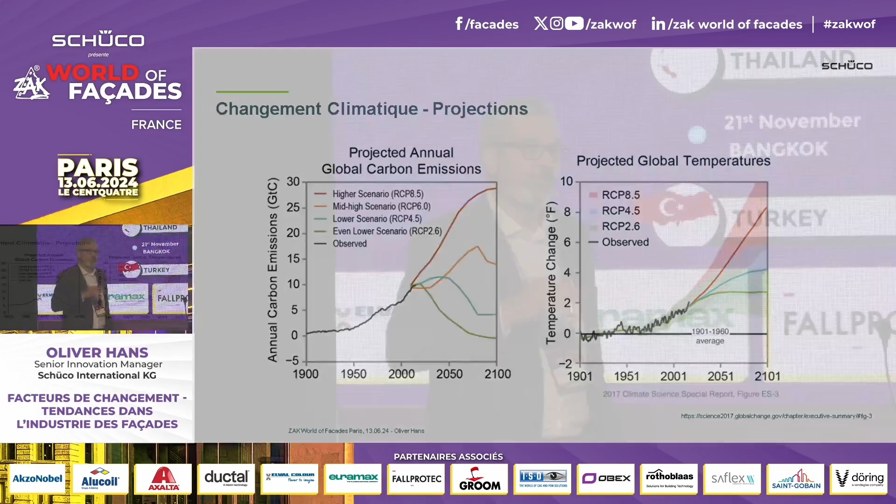And the average global rise of temperature last year was 1.3 degrees. But that is sea and land. If you take out sea, it's 1.8 on land. And Europe is one of the fastest heating continents. And this leads to a lot of countries developing risk maps. They're assessing the potential risk and how resilient the country is and certain regions are.

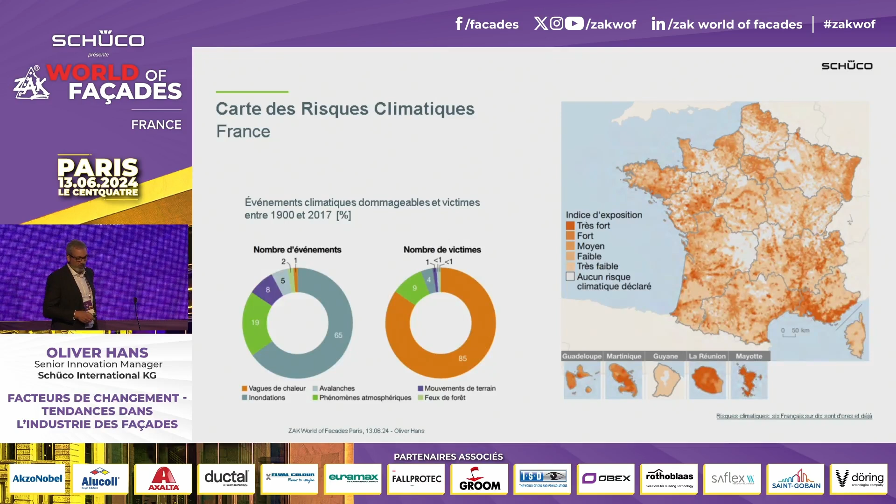And we can see that over the past 117 years, the amount of events, or the percentage of events, the highest being flooding, and at the same time, on the right side, you can see the impact it has on humans. And human death is connected to heat, not so much to the water problem we're getting. And this is costing huge sums of money, and this is costing a huge sum of lives worldwide. And this is growing, and this is why everybody has to act.

And as we saw, the curve is exponential. It's not a slow linear growth. The pressure is going to increase. It's going to have to increase because it's economically sensible, and it's also protecting people's lives. And more discussion is on this subject, and we can see that The Economist in April had a title story on it, making it clear to people that this is a huge shift in economical logic.

And we can see that there's startups going into this area, making it viable to assess the quality of a property before I buy it. And insurance companies are reacting to these risks. Huge costs. The whole risk management is changing. And there's areas in the world where you can't even get an insurance for these risks, which means the properties are basically not of any value, and at least in the next couple of years, the value will degrade, and that is exactly what The Economist was looking into.

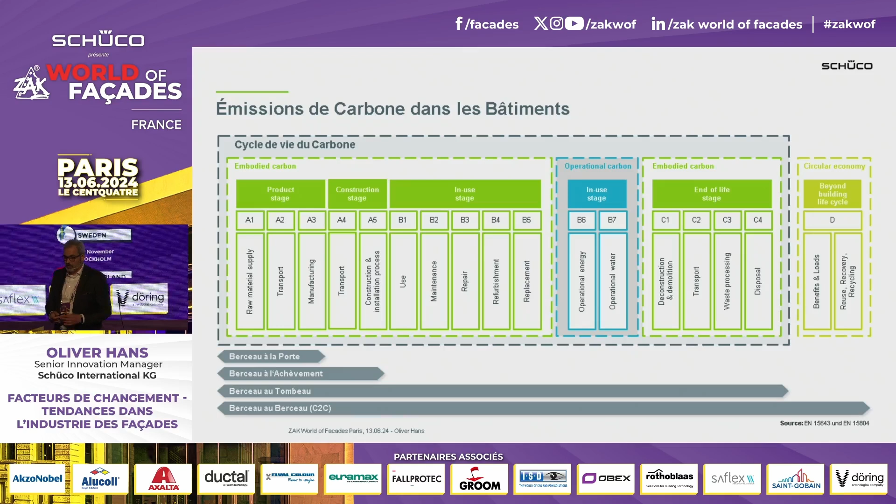And there's been a lot of addressing of this topic in regulation, and one of the EU norms has looked into the whole life cycle, the carbon emissions in the whole life cycle of product. And it's changed a lot. We used to focus very much on the operational carbon side. How much energy are we using in the use of this building? But it's shifted to a more global perspective. So we look at how much CO2 is emitted during the transportation of getting material to the factory to produce the product that is then installed in the building, and so on, and how much CO2 is in the maintenance of this product when it's installed in the building.

So we've shifted from basically producing something, watching what is happening in use, and then thinking maybe about the recycling part, to assessing the whole life cycle. And this includes water by now, and this also includes biodiversity, which is a huge issue, which we underestimate, I think, as humans, because we can't see it as much. We don't really react to things we can't see. That's why the oceans are not of a big issue to us at the moment.

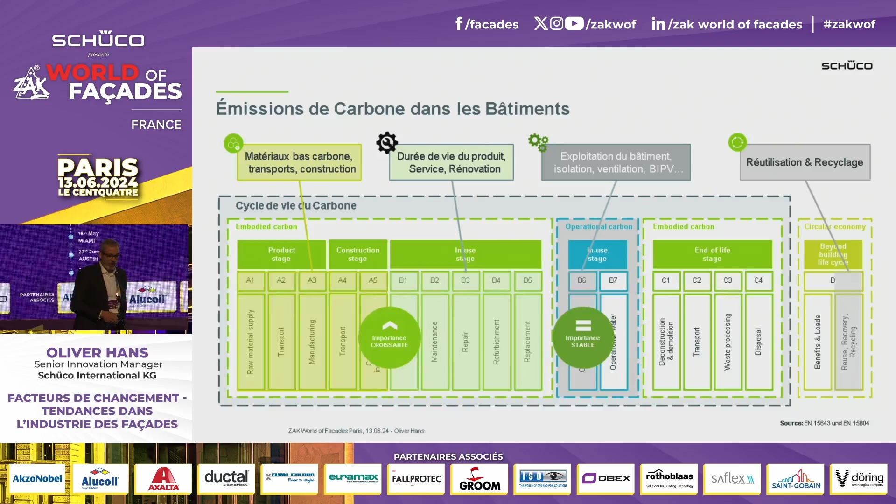But this whole operational use of carbon, or the production of carbon in the operation of buildings, will remain, but all these other topics will shift in the way we look at buildings, and there's a sort of carbon economy underlying this change. And all that said, it has led to a project we launched over a year ago, which we call Carbon Control, which sort of aggregates the services, the product logic, the things we can combine in one large toolbox to address the carbon emission issues that we have in our product, in our industry.

So what is Carbon Control? Well, Carbon Control is basically a logic. It dissects the life cycle, as we saw in that regulation chart. It dissects the life cycle of product, adds service, and puts it together into a package where we look into the planning of buildings and facades, the construction, the operation, and the deconstruction. So we have, on the top left, design to decarb, we have build to decarb, we have operate to decarb, and we have recycle to decarb. And these areas all look at facades in a bit of a different way and offer a different service logic for the respective quadrant.

So in the design to decarb, we have different services and different approaches that we use inside the company. So for instance, we assist in designing the right covering of the building, understanding the amount of aluminium that is needed in this design, trying to reduce the aluminium. If there's a bespoke solution, of course, it's the economic viability of a project. If we can reduce the cost, reducing aluminium usually reduces the cost.

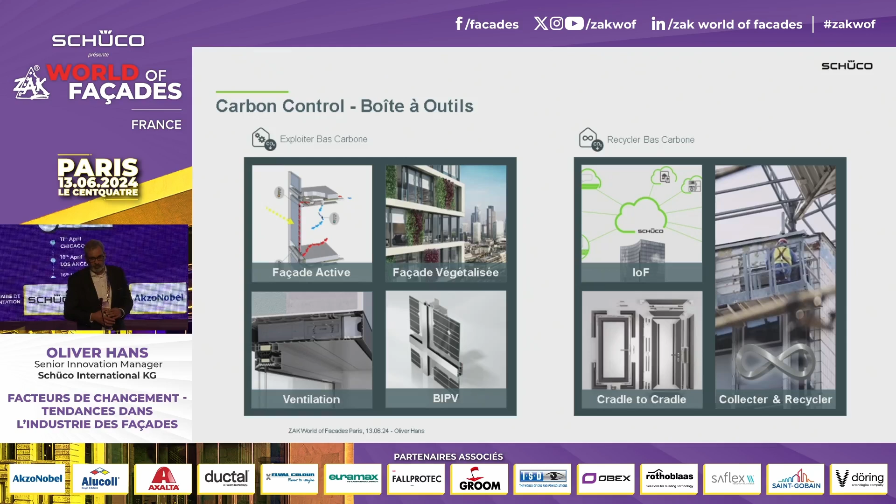And I say that because the automotive industry needs aluminium very much at the moment. Electric vehicles consume a lot of aluminium, and at the moment we have a situation where there's very little aluminium coming out of the building construction market, and we have to keep that in the construction market because aluminium is a super recyclable product.

So let's go into renovation. If we want to use less, we have to renovate. We have to use the structures we have and use them for as long as possible. We just saw that in the Bollinger-Grohmann presentation. Super interesting project, and that's exactly the way we have to go, especially the last project in Düsseldorf, which of course I know.

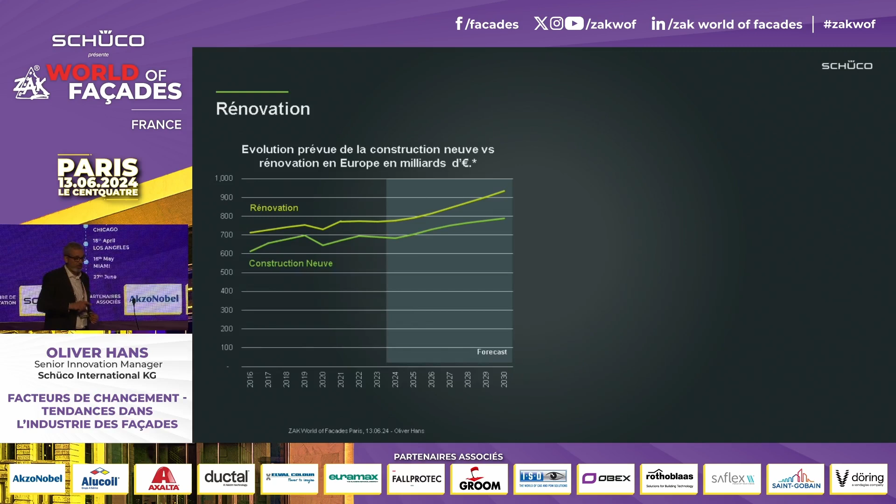So renovation has always been a large segment of the market, and it will be a growing segment. We all know there's a renovation wave in Europe, and there's going to be pressure, there's going to be money put into it, and it will also be because of the climate change that people will be driving it even more. I said it's an exponential curve. We'll be feeling it harder, and we'll be reacting harder.

And in France, the figures are not so different to Germany. We heard already in the first presentation, and Jacques Lador also said it, we have very hard carbon goals, and this means that we have to work on our buildings, our building stock, because the building stock is the largest part of our built surroundings.

And in Germany, the figures are the same. If we want to achieve the targets, we'd have to be renovating approximately 3 to 3.6% of these buildings. De facto, in Germany, we're renovating about 0.6. So the speed has to increase massively, and it will. There will be force.

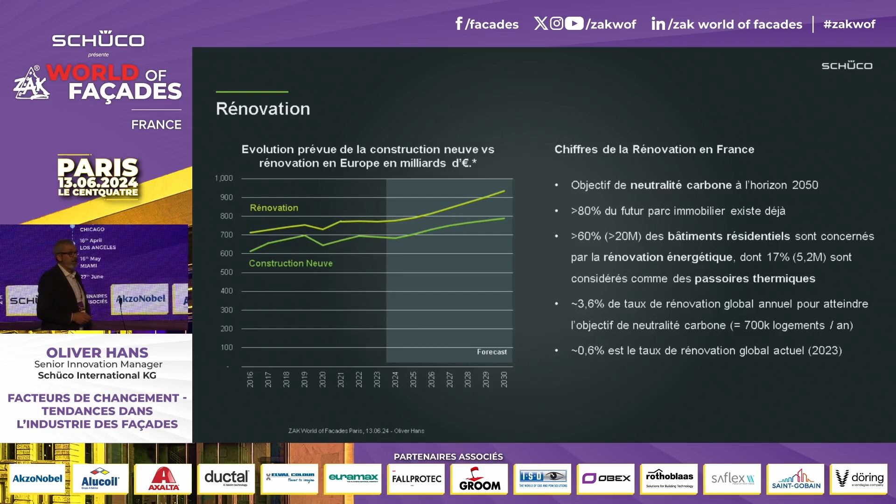So what types of renovation do we have, or what do we see as potential renovation at Schüco? Well, try not to renovate. Try to keep something functioning as long as possible. So maintenance is the first thing. We have our own service team at Schüco that services products. In the Netherlands, we have a service team that services competitor products because we believe we have to keep these things functioning as long as possible. And it is a business.

If things break, repair them. Build them so that they can be repaired, which we do. We have a systems tradition, so we can take new fixings, for instance, and introduce them into old systems. We can repair old systems. Not all of them, but quite a few.

Sorry, one back. We can upgrade systems. So we can add new gaskets, for instance, and make it airtighter than it was, even when it was introduced. We can refurbish. I'll be showing an example where we put in new vents in an old frame, and in that way we can decrease the U value, airtightness, etc. It's not trivial, but it can be done because we have a system logic.

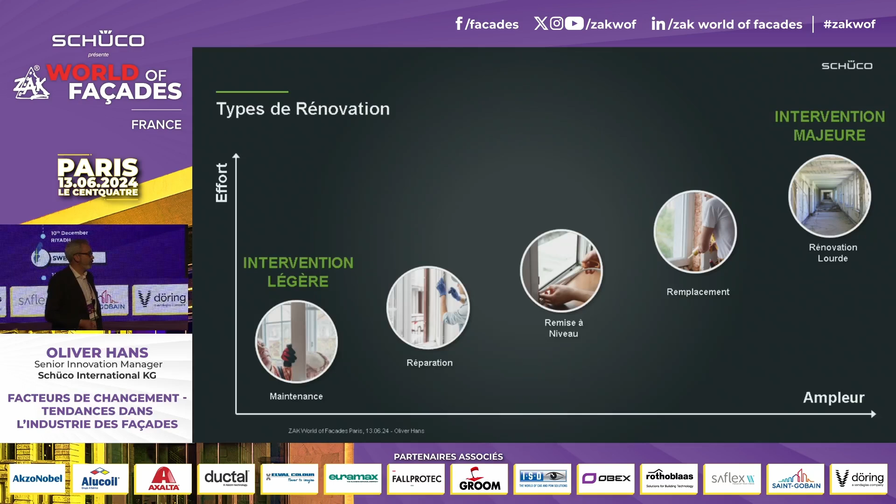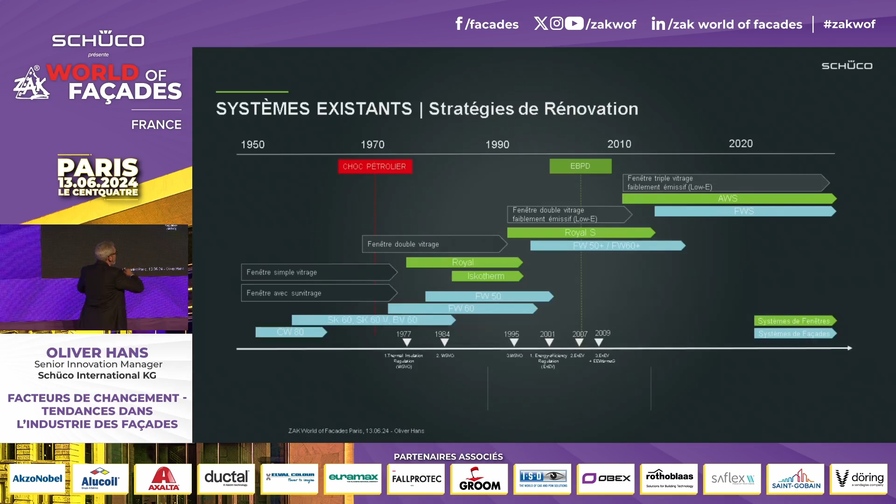And in the worst case, renovate, extract, and put in new. That's the easiest, and that is the most common in large-scale projects. So if we look at our system legacy, these are the non-insulated systems. Then came the energy crisis. We introduced the first insulated systems, and the insulation values have grown over time. The systems have become tighter.

They've taken first double glazing, then double glazing with coating, and the change of filling gases, and then later triple glazing. And we've even had projects with quadruple glazing. But some of these systems can be adapted. They can remain in the building.

The really old systems that are non-insulated will commonly have to be changed, although we're working on improving non-insulated systems and lifting their U value. We'll be showing that in the near future because there are ways of doing that. And I'm working on a project in the Netherlands where we're doing that at the moment.

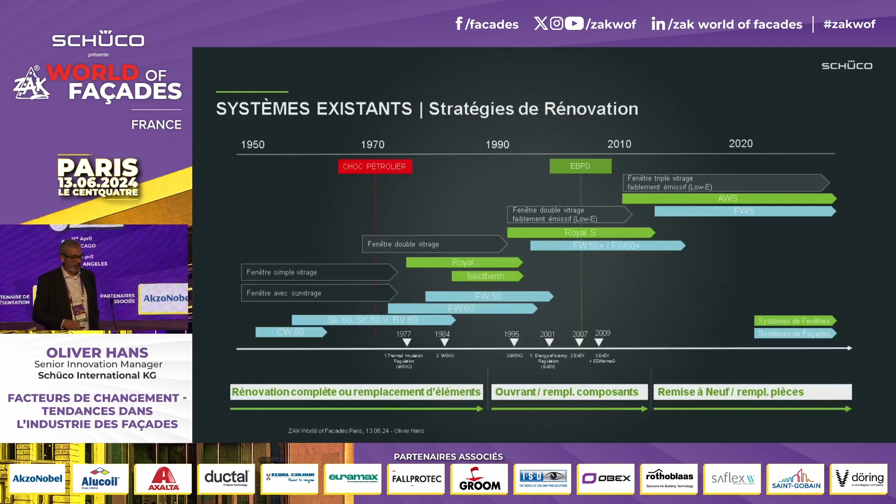Or we can change components, we can upgrade them, change the vent, for instance, which I'll show in a second, or just change gaskets, add foam sometimes, and that can be enough to lengthen the lifespan of this product in situ. So I was saying we can take out old vents and put in new vents with new fixings, etc.

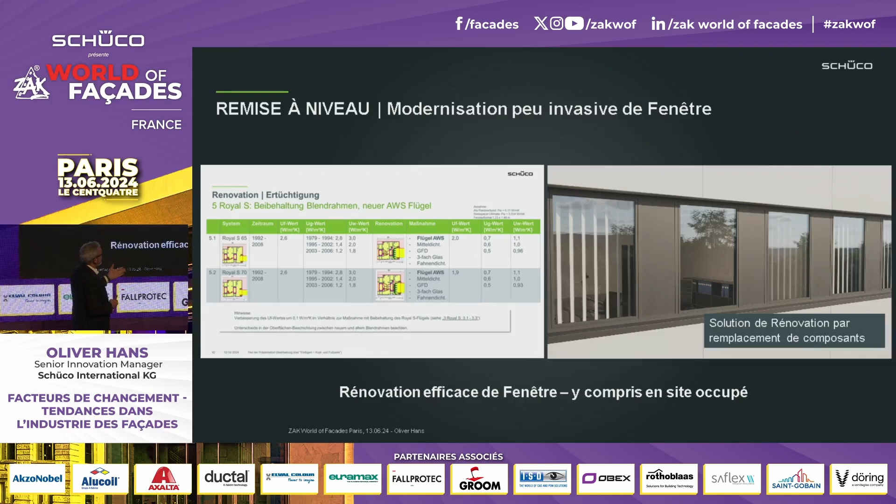We've looked at it in different compositions, and you can see here there's a UW value of 3, which by changing the vent with added foam, changed gaskets, we can change to 1.1 in situ.

And this is not something we can do in every project. We have to look at it very intricately because there's building physics. We don't want mold in the building. We have to look at everything in the situation in the building. But we have looked into it, and it is possible, and it's possible because we have a long-term system logic.

Other variations are taking the old frame and putting on a renovation frame, inserting a whole new window in the same place. Again, we have to look at the specific building. It's a project solution, but it can be done, and we have been doing it in different projects for quite a while now.

Other minimally invasive tech is adding layers to an old system in facades, for instance. So similar to what we saw in the windows, we can do something like that in stick constructions. It's actually not as complicated as you could see in the video. And if structurally capable, we can even upgrade the quality of the glass in that area.

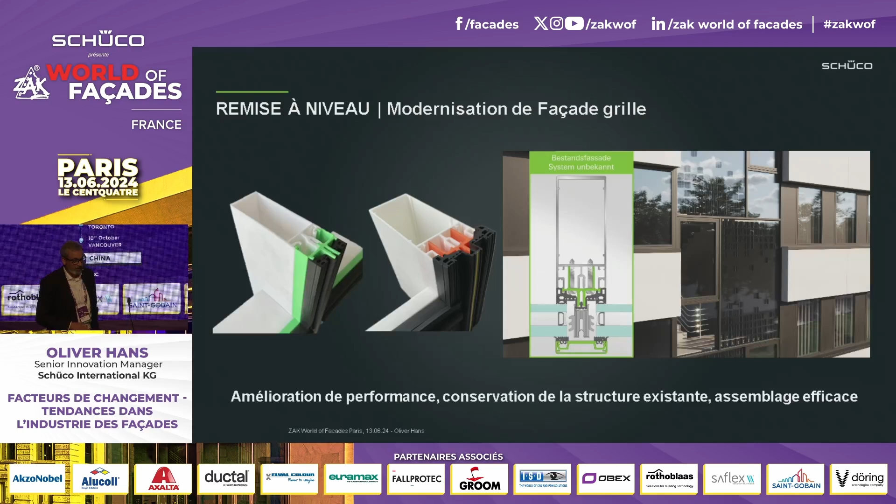And the next level would be to completely install a new facade on the outside. We have systems that can span from ceiling to ceiling while the building is in use. Add a facade layer from the outside, leaving the old windows in place, adding BIPV, for instance, solar shading. We heard solar shading, and I said heat is the biggest killer.

Adding solar shading to the outside, adding a decentralized ventilation on the inside, and then when the office area at a certain time of day or in a short period of time is not occupied, extract the old windows, and the new facade is already in place.

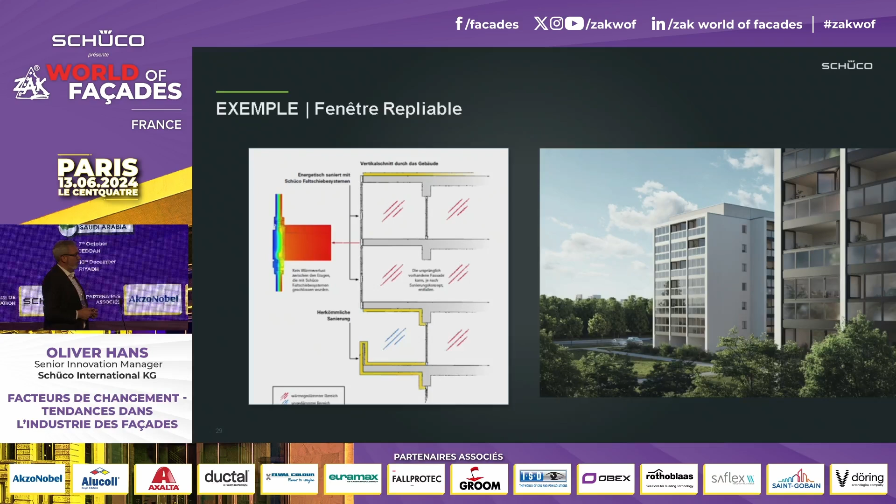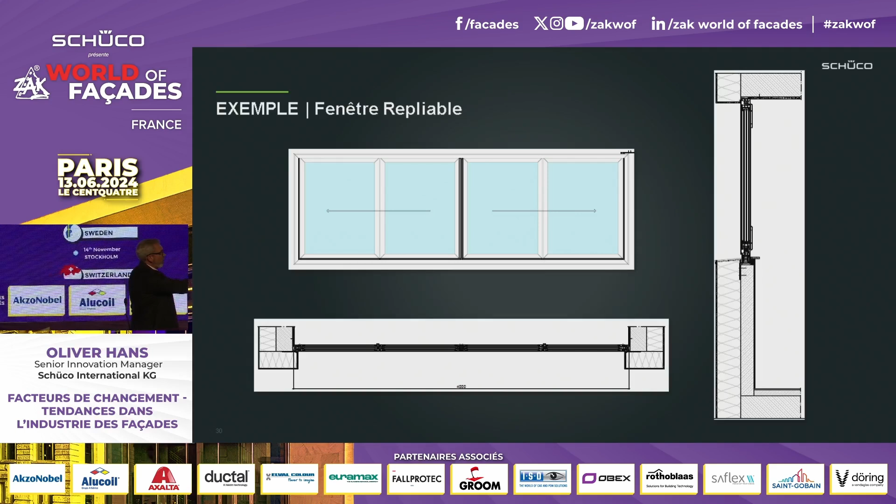adding basically a winter garden, and at the same time reducing the amount of effort put into it and adding new possibilities of architecture to the outside layer with the insulation area. So you can see it with a glass spandrel, or you can see it here, if required, leaving it with the concrete spandrel.

And with that, I'd like to come to an end. We are part of the problem, every one of us. It's not a business that is creating CO2, it's people actually doing it. It's us driving cars, etc. But at the same time, we're part of the solution.

So we are very ingenious as a group. We're very ingenious at developing new things. We enjoy doing that. And if we work together, we can achieve quite a substantial amount of improvement.